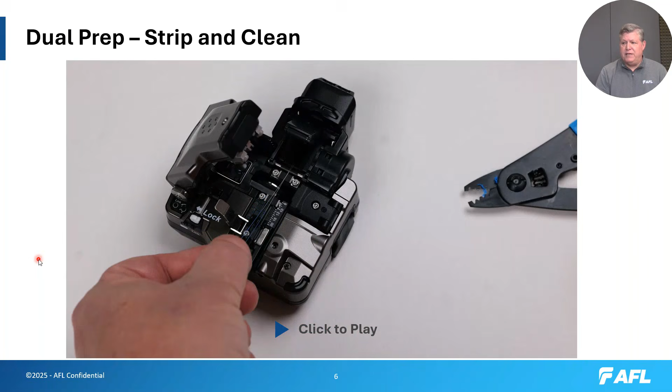I'm going to click a real quick video. So you'd strip the two fibers simultaneously, then clean them - you'll notice the two fibers are parallel. That third pass is actually pulling the coating out so I can load it into the adapter plate and cleave both fibers at the same time. So that's the first step of the dual prep method: strip, clean, and cleave those fibers simultaneously.

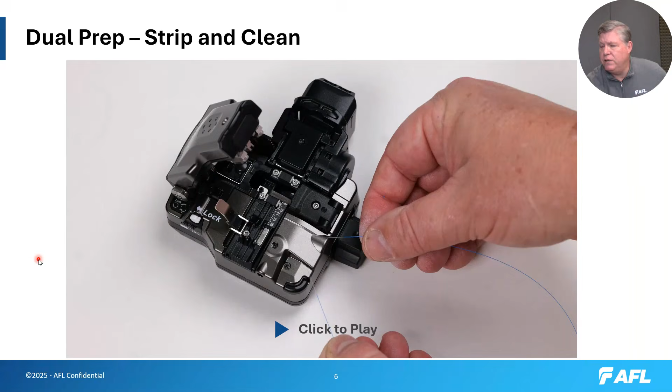Move on to the next page - this is the third step. This particular mechanism has set plates with pressure plates on the left and right side, and I'll illustrate how we do this. In this illustration, in order to see the fiber, I did not use cleaved fibers in the V-groove. I actually used coated fibers - they're yellow - so you'll be able to see the fiber from A to Z as it goes in.

As you can see, very quick to load those fibers. So it's all about speed. We feel like we've made some big advances with that, and it's been well received in the industry for the past couple of years with the introduction of the 35S and 45S.

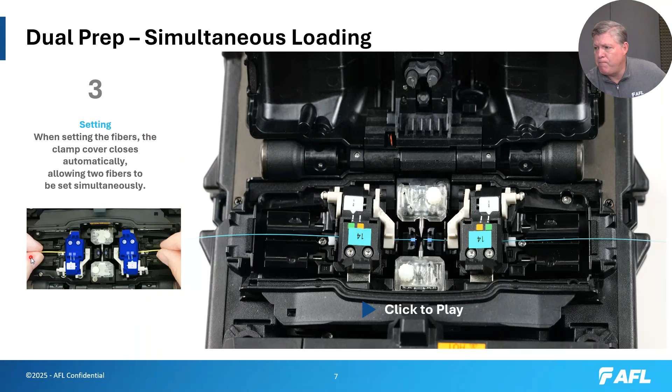The big advantage of this is it eliminates a common problem. Everybody that's been doing splicing for 20 or 30 years more than likely has lower back pain, and it comes from splicing a 288 cable, or 432 left and right side, having to hover over the top of the machine as they load those fibers into the sheath clamp mechanism.

This is what we call loading fiber confidence. With this long extension of your arm, you may not locate the fiber in the correct position. With the old style system, the 90 series and older model Fujikura splicers, if you extended the cleaved fiber past the electrode pins, it would actually trigger an error alarm immediately. This 100S has an expanded range of motion, so if you happen to put it past the electrodes, it will draw that fiber back into the correct range.

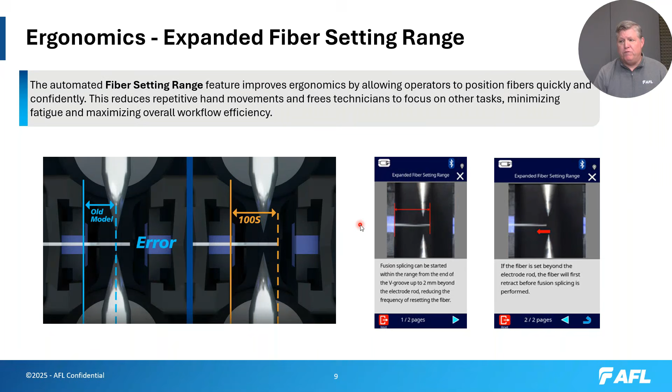This is an illustration. The two menu sections on the right-hand side are from our Splice Coach, explaining this feature as it operates. But again, it comes back to ergonomics — you're loading away from your eyes, so to speak. So if you happen to overshoot a little bit, it will auto-correct for that.

We have what we call onboard assistance, called Splice Coach. There's a question mark on this machine that will allow you to access various stages of splicer operations. The old system was a flash drive that you would download to your PC, and you'd either work from an electronic copy or print off a hard copy of the operation manual.

This is basically taking that table of contents — you press the question mark, the table of contents pops up, and you locate the subject matter, such as exchanging fiber holders, putting set plates in, or how to clean a fiber. All these features and capabilities, which fill a manual of over 100 pages, are condensed into this table of contents, so you can quickly find the content you're after at the touch of a button on the monitor. You'll see illustrations, or possibly even a video of a process you want to learn more about.

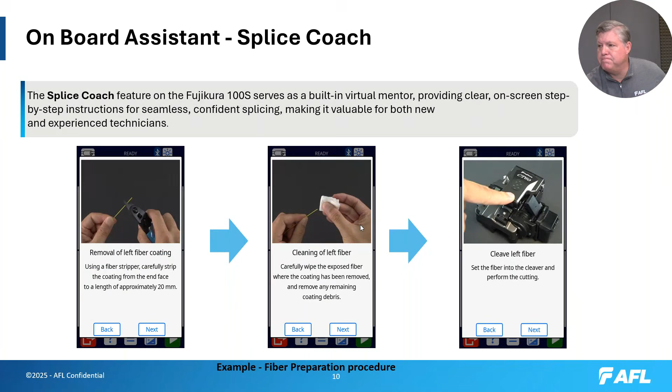I love this particular page. When we introduced the 90S, we made a bit of a mistake, in my opinion, in how we set up that system. As it shipped from the factory, it was set up on hyperspeed — meaning when you close the sheath clamps, the wind protector would close within 0.6 seconds. It was all about speed and efficiency.

Hindsight being 2020, what we've instructed our sales team today is to push the customer to optimize the system for their normal work habits. Don't try to press them to do the next stage faster — build the system to accommodate you, the operator, and your preferences, rather than the machine pushing you forward without any delay, so to speak. So this will allow you to customize how you handle this machine.

From a normal process for me, when I load the fibers into the sheath clamps, I do not like that 0.6 second wind protector delay. I prefer it to be delayed to like 1.5 seconds. If it's a new technician, they may want a 2-second or even 3-second delay before that wind protector closes, just to make sure everything is correct.

Now, with the mass fusion splicer, I do not like the trigger being loading the fiber holders into the wind protector and then the wind protector closing. My personal preference is to load fibers into the machine with the fiber holders, and have the trigger to start be when I close the wind protector.

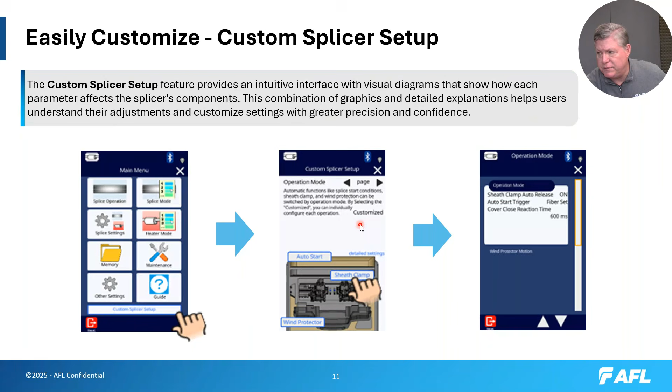A GPS feature. Now we have a beacon on our splicer that will document the location of that machine. The first thing for this GPS is when a splice is made, it will document the coordinates of that splice. So when you make a splice in memory, you not only get the splice loss and the parameters that splice was made under, along with a date and timestamp, but now it will give you a GPS location of where that splice was actually made. That's the first function of the GPS feature.

The second function is what we call geofencing. Once you buy a machine and have it at your central location where you normally work from, your home position, so to speak, you can plug in those coordinates to make that your center location, and then set up a geofence in kilometers. You can set up 1 kilometer, 10 kilometers, or even 500 kilometers if you'd like. As long as that system is within that coordinate range, the machine will be operational. As soon as it goes out of that geofence location, it will disable operation, and at that point you would have to put in a password in order to override splicing outside that geofence location. A simple operation.

Here's a little bit about active blade management. One thing I'll point out on this page is the cleave counts. With the CT50, right out of the gate, you're on the low blade setting and you would maybe get 400 or 500 cleaves before having to rotate the blade. With the CT60, those counts are going to be much, much higher based on how we've set up this CT60, and I'll explain more of that in just a moment.

The machine now has a USB-C plug. This USB-C plug will allow you to use an external battery or an external power source. The only requirement is that the input source coming from that USB-C is power delivery capable, with 18 watts of power available to operate the system. So if you happen to get in a situation where your battery's dead and you have an external USB-C source, you can power this splicer and operate it from there.

One little thing about the electrode life: as you can see, it has moved from 5,000 plus arcs on a 90S to approximately 6,000 arcs.

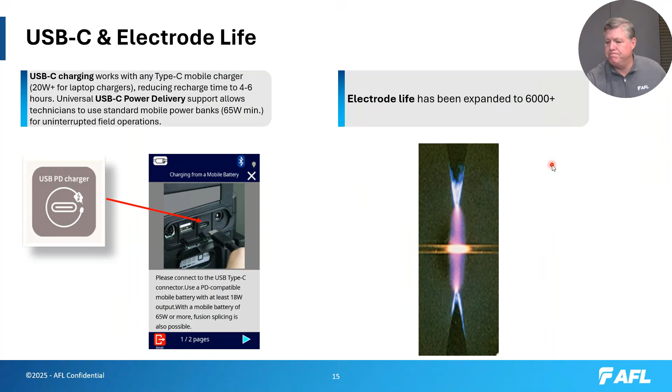We have a new work tray. It's very similar to the 90S, just a little different in functionality. You'll notice a large deep well tray on the bottom that allows you to put larger height material, like cleaning swabs, in that left-hand cavity. The right-hand side is a flip mechanism that comes up to allow you to put in your power supply, feeding power to the right-hand side of your splicer. On the front, there's a small extension tray that holds your cleaning wipes, alcohol system, and strippers.

The case itself is standard ABS plastic. We found this material, same as the 90S, to be extremely durable and produces a durable product for you.

Dimensionally, compared to the 90S, you'll notice the width is a bit narrower on the 100S. The depth is approximately the same. The height is approximately 20 millimeters taller than the 90S, and one reason for that is this monitor has flipped from a horizontal position to a vertical position. And of course the CT60 Cleaver is just a tad smaller than the CT50 Cleaver.

Let's talk about the CT60 Cleaver. Key features: performance. We're pleased to report the CT60 has slightly better performance than the CT50. You can see the bar chart, the bell curve, is a bit taller and tighter across the board. We've done this by improving this little arm assembly.

These are the elastomer pads on the extension arms. It's a little bit shorter, which controls the variability a bit. We'll talk about the blade in just a second.

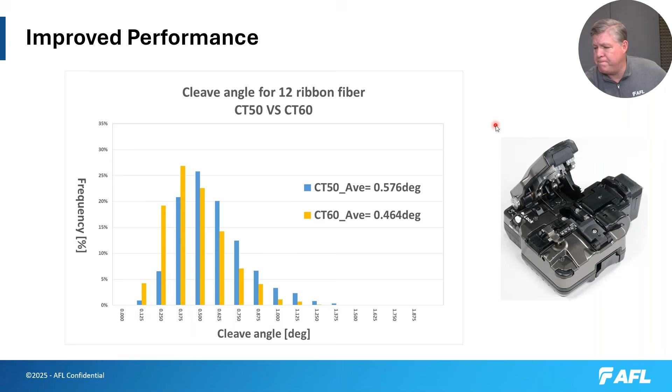I think we've hit a home run with the CT60 Cleaver. When you work with the CT60, you'll notice we no longer have a 16 blade position - we've got 28 position blades. But we have removed the height adjustment knob on the front of the CT50; we've eliminated height adjustment with the CT60.

Operationally, if you're familiar with our legacy CT30 Cleaver, which was very popular in its day, the CT60 closely matches that method of operation, using a thumb press where you actually cock the cleaver to stage it for cleaving.

I'm a big fan of removing the blade height adjustment screw. One problem with the CT50, while it was a very good cleaver, was that this screw was on the front and very easy to bump from a low, medium, or high setting - you could quickly lose calibration due to misuse of that thumb knob.

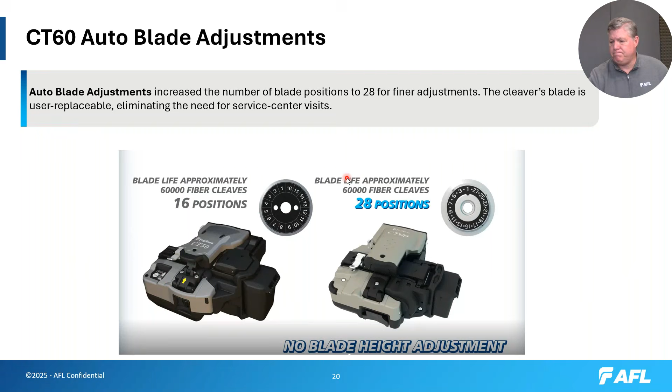On the back of the cleaver there's a small toggle mechanism. Depending on its position, you set up the cleaver for what we call hand operation, where the main anvil clamp assembly only opens about 30 degrees, allowing you to hand operate the CT60. Flip the toggle the other way and it opens to what we call benchtop operation, allowing the jaw to open approximately 50 degrees. So it gives you flexibility in how you want to use the system.

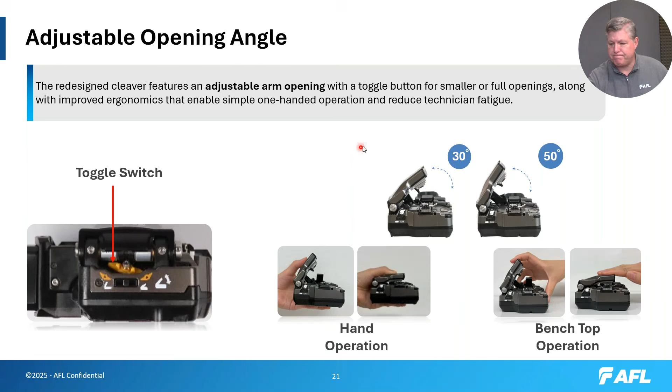Legacy key features - this goes back to ergonomics, and I'm a big believer in this ergonomic process we're pursuing. The main reason is that when you take out steps and add automation, it reduces fatigue on the technician. They don't have to eyeball things so closely or constantly look at very small pieces of fiber all day, day in and day out.

It also eliminates motions and steps, and at the end of the day we hope this means less fatigue and fewer possible injuries - things like back fatigue, carpal tunnel syndrome, and other issues that come from repetitive motions. So we're a big fan of these operations.

This ergonomic splice protection is actually part of the 90S, but I wanted to briefly show this because when I go out and do training, a lot of folks don't even recognize this as a capability with the 90S, and it's also been incorporated into the 100S. This splice is made in the center here, and the sheath clamps have already opened up. This is the splice protector sleeve on the right-hand side. These are what we call fiber retention clamps, I kind of refer to them as feather clamps.

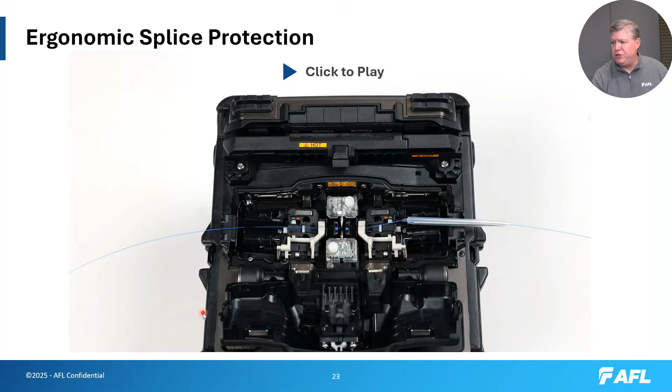Again, it's about ergonomics, taking steps out, and hopefully you go home and enjoy your family a little bit more because you're less fatigued.

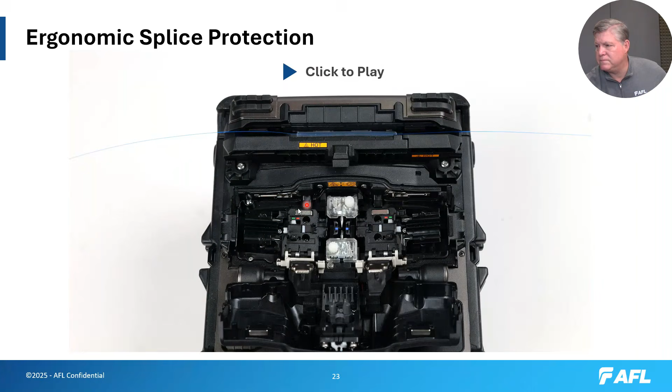Wanted to talk about auto arc calibration. When you use any of the auto modes, the machine will actually measure the arc power during the arc, checking the intensity by measuring the brightness of the arc as it's being produced. If it's in the high range, you'll see this magenta line, meaning the arc is too hot, and it will drop the arc power down. If it's in the pink area, it's too cool, and it will auto calibrate as you're making splices. This is already built into the system, and it eliminates a lot of variance, keeping your machine calibrated throughout your day of operation.

We still strongly recommend that you do an arc calibration test in the morning. The main reason is if you have a major environmental change, like a cold front or high pressure system rolling in, it can dramatically affect your arc power, so you want to make sure you're dialed in for that morning. Once you do that, the auto arc calibration will keep it in tune for you the rest of your day's use.

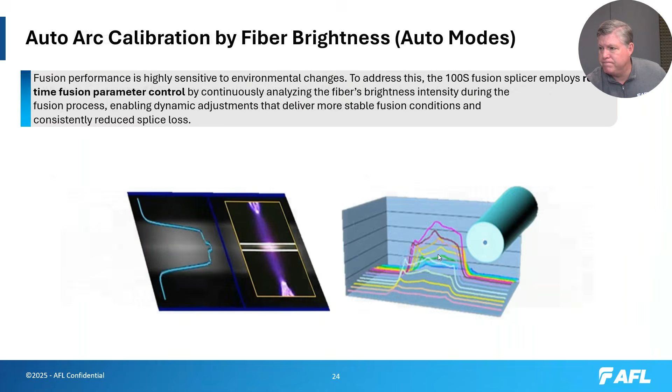So if you have this situation, I always tell folks to use that auto mode right out of the box. If you go to a location where you can't identify what type of cable you're splicing, that first splice should be done in full-blown auto mode with fiber characterization so you can verify you're in fact dealing with the fiber you're thinking you're working with. Hope that helped.

So as we talked about that, I will show you this pressure plate mechanism - I'm just going to show you an illustration on the right hand side. So this is the mechanism as I push it down, but as I mentioned, this groove is really designed for 250 micron or 900 micron.

If you happen to have a situation where you've got 2 or 3 millimeter cordage, this slot will be too narrow. So all we really have to do is pick this up and roll it out of position, and that will allow you to use the sheath clamp without that.

Now also, we'll come in and show you - I can lock that mechanism. So notice here, now that I've disabled that pressure plate mechanism, it would act like you would normally associate with the 90S. So I'll come back and flip this on.

And you can see that pressure plate is working fine. And then of course I can flip it up for 900 - fingers are a little fat - and that is your normal pressure plate.

So literally I would have my fiber, roll it in, and I would close that sheath clamp mechanism. You'll notice here these fiber retention clamps - I use these and I'm a big fan of them. So when I do put my splice protector sleeve on, I don't have to eyeball where the splice is in relationship to the splice sleeve.

But if you don't like that feature, all you've got to do is come in and flip this switch from green to yellow, and the fiber retention clamp mechanism is locked into the sheath clamp mechanism.

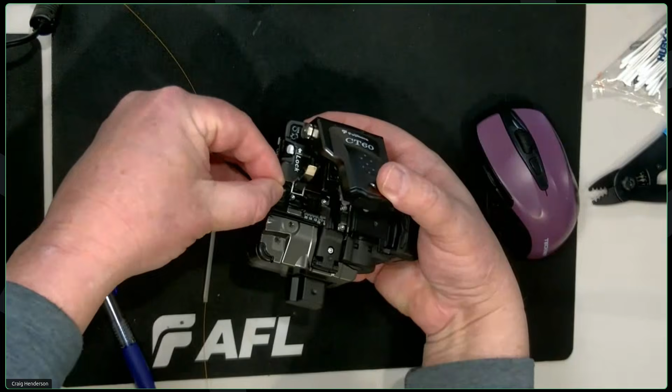This is the toggle on the back of it. See that toggle? That will allow me to hold it this way to cleave in my left hand, or I can flip it over to this side to cleave in my right hand.

The trash collection system is very similar to the CT50—just as large. The blade rotation is, of course, attached to a Bluetooth mechanism, or I can flip this over and show you it also has a manual rotation of that cleaver blade, so you do not have to install batteries or use Bluetooth on this mechanism. To lock it, simply close it down and flip the lock switch on the back to lock it in position. Very pleased with this cleaver.

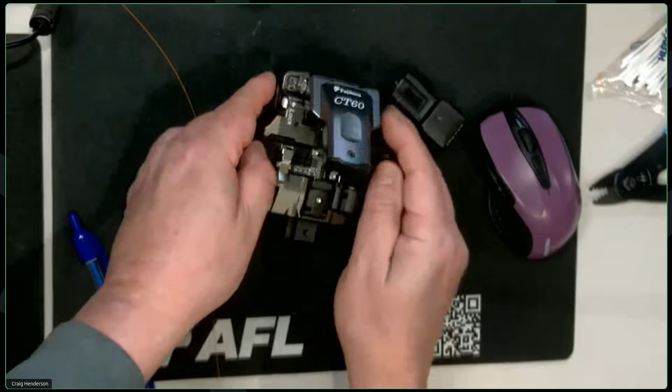I think we've hit a home run with this. I'm so happy they kept the Bluetooth—I think that's a necessary mechanism, especially when you're dealing with mass fusion splicing. And of course, this will work with 12 and 16 fiber counts as well, just the same as the CT50.

Perfect, okay. I did have a question here—someone asking about the difference between the 100S and the 90S. Is that something you can answer?

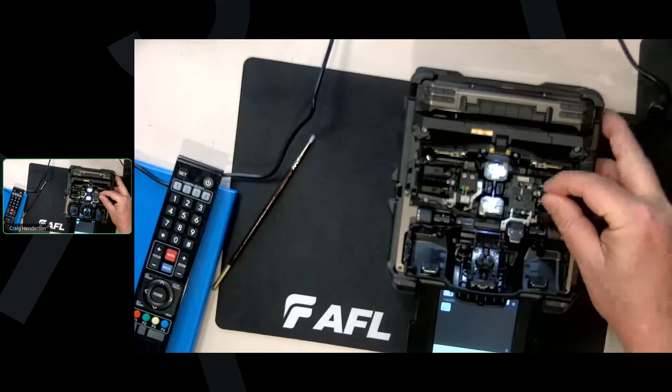If you look at the spec sheets on the 90S versus the 100S, you don't see any real improvements in quality, because with a G.652 standard fiber, you're looking at a .01 to .02 dB splice loss either way—there's really no improvement in those areas. The machine works just as good as the 90S in those particular scenarios, so the spec sheet doesn't show a lot of differences. I think the big advantages go back to the ergonomics of this machine—being able to load a fiber arm's length away and close that sheath clamp arm's length away, eliminating that hover.

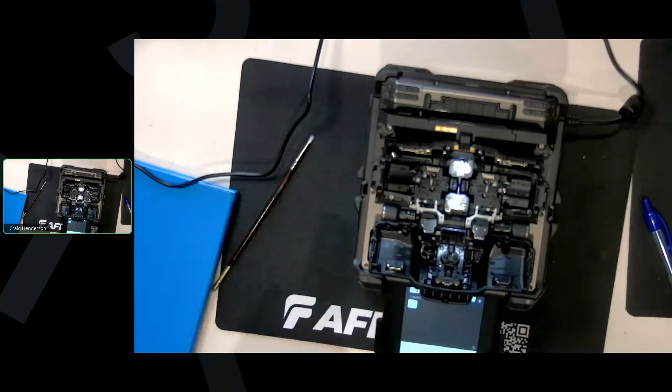People are asking, can you do a splice? Can I do a splice? Yeah, sure, they want to see the dual operation mode. So you want me to run through this? Let me flip here, I'm going to move over to my cleaver. Let me get the correct angle here.

Let me pan back out.

Okay, so I'm going to show you dual prep, dual strip. Now, the first thing I always do, if I'm coming out in the field helping somebody splice, I'll ask them, can I get my hands on the Q-tip? Anything that comes in contact with that cladding, I expect to be extremely clean. But the cleaver itself, I checked it out this morning, gave it a QC check. So it should be good to go.

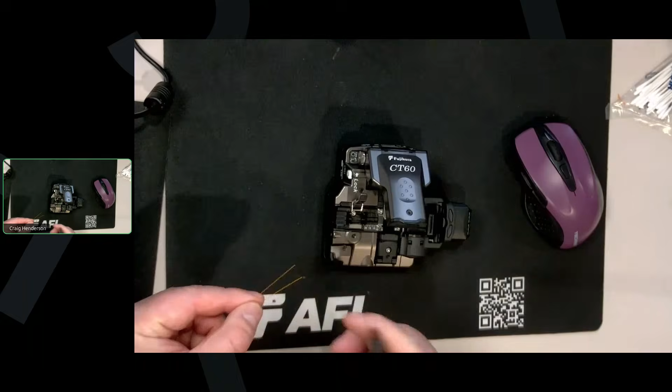So my fiber, I will come in, kind of the technique, and I'll walk you through a play-by-play. It will cause me to be a little bit slower, but it also will give you some insight on how to do dual prep and maybe make this a little easier for you, because it does require some practice. So the first thing that I'll do is I'll get my fiber with my stripper, and I will use the jaws of that stripper.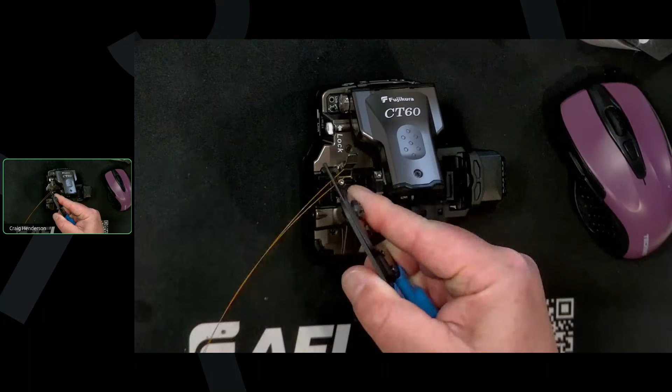So the stripping process: as I get my fibers in here, notice I'm clamping the very tips of the fibers. The only reason I'm doing this is it allows me to grab with my index finger and thumb on the backside and pull this out a little bit. Notice how those fibers stay parallel now. So I use the two channels in the stripper to gauge my parallel setup for my dual prep, which lets me clean both fibers at once.

I will clean them, so I just wipe them twice. This third time, I'll hold the fibers and let my index finger and thumb slide, and now I've got my fibers extended. Go into my cleaver, drop them into the adapter plate. I'm going to turn it up a little bit so you can see it.

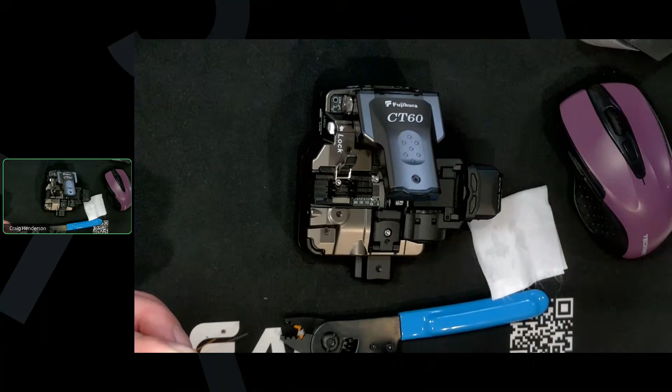So I'll come in. Now I'm going to do this on purpose. I'm actually going to take one of the fibers and extend it past the electrode pin.

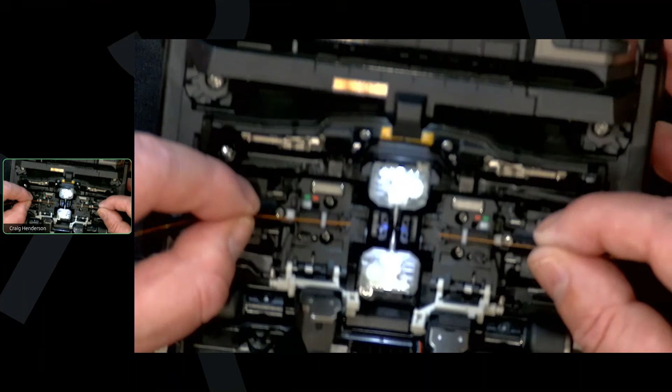It is not focusing. Hold on. You go to 3. I apologize, guys, it was so fast.

So I have the pause turned on. I'm going to reset it one more time and show you this action and show you pulling it back. Now see that fiber come across the monitor? So I'm just going to press set. I intentionally set the fiber past the electrode to show you this new extended fiber feature.

See it pull it back, and now it's going to set the proper gap and make the splice. Notice it's on full-blown auto. Pause is on, I'm going to press set again. Normal operation, daily activities, I don't have my pause turned on. I'm kind of working in the SM auto mode and making the splice as quick as possible.